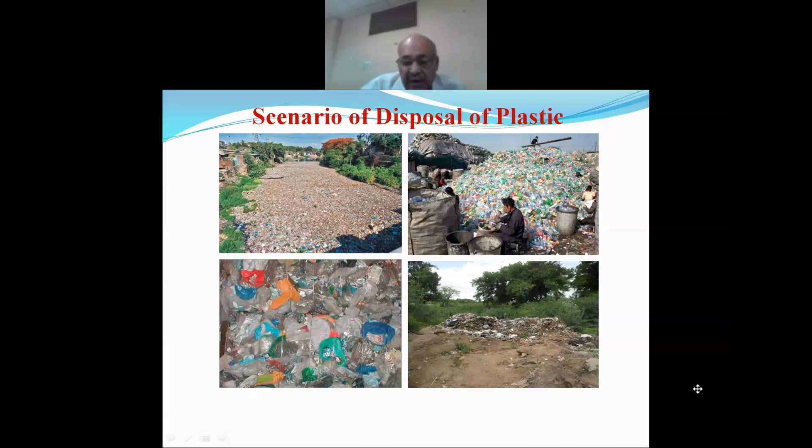Similarly, use of plastic waste and used tires in road construction is the need of the day to have a cleaner India. The Prime Minister also announced and suggested the use of rubber and plastic in road construction to alleviate its disposal problem. Waste is wealth, and we have to look for alternatives, methods and technologies to utilize waste in road construction and other developmental activities. Roads are one of the best consumers of waste.

Let us use non-biodegradable waste like plastic waste and rubber from truck tires in road construction. In this slide, you can see the scenario of disposal of plastic. On the top left hand side, you can see that plastic is dumped in the drain and has totally clogged it. On the right hand side, you can see how plastic is scattered outside, making wastage of usable good.

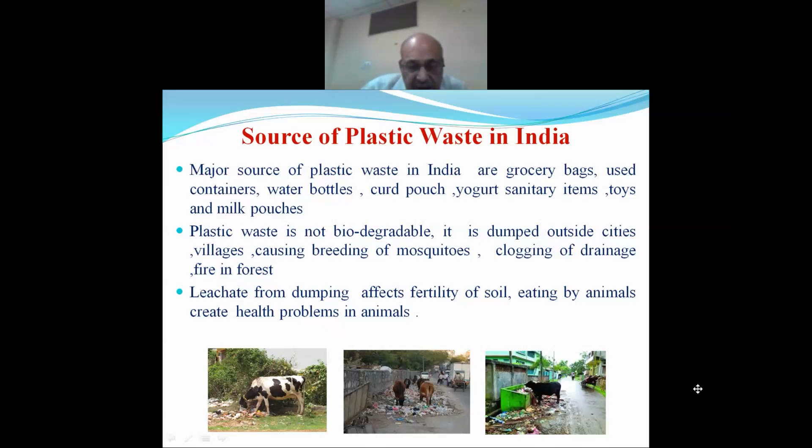If we consider the plastic waste, the optimum dose is 6 to 8% by weight of bitumen. At the same time, if we consider crumb rubber from tires, the optimum dose is about 8 to 10%. Therefore, roads are a better candidate for use of this non-biodegradable waste, particularly in our country.

Sources of the plastic waste in India: there are various sources like grocery bags, used containers, water bottles, curd pouches, milk pouches, yogurt cups, toys, etc. And the plastic or polymer used in making these goods is not biodegradable, and therefore it cannot degrade in the soil.

It is dumped outside cities and villages, causing breeding of mosquitoes, clogging of the drainage system, and many a times presence of this plastic in forest areas leads to fire. The leachate from dumping affects fertility of soil, and many a times people throw plastic along with eatables, which is eaten by animals, creating health problems. Many a times cows and buffaloes die because of eating the plastic.

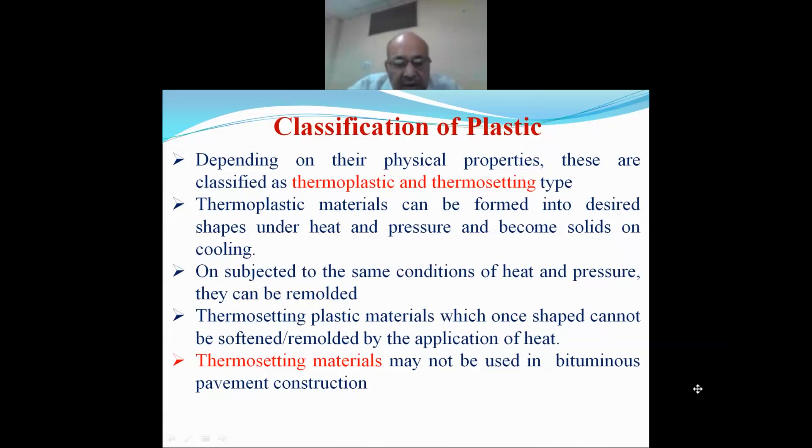Now we have to understand, when we are going to utilize any waste in road construction activities, we must understand about the material also. So depending upon physical properties, waste plastic is classified into two types: one is thermoplastic and the other is thermosetting plastic. So what is the difference between thermoplastic and thermosetting plastic?

Thermoplastic plastic melts upon heating and becomes solid upon cooling, and this can be remolded and is ideally compatible with bitumen. But the thermosetting plastic, once heated, cannot be remolded back. So we cannot transform one form of thermosetting plastic into other form, and this is not compatible with bitumen.

Thermoplastic plastic can be formed into desired shapes under heat and pressure and become solid on cooling. Thermosetting plastic, once shaped, cannot be remolded or converted back to its original form, and shall not be used with road construction.

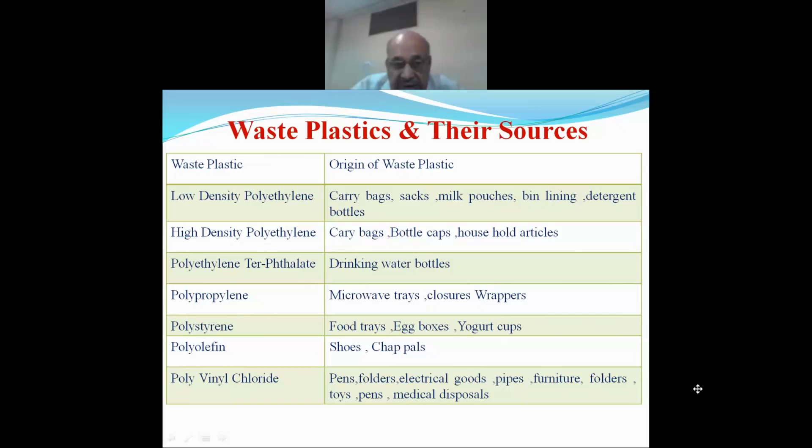What are the sources of different types of thermoplastic plastic which can be used in road construction? Low density polyethylene sources are carry bags, sacks, milk pouches, detergent bottles, etc. High density polyethylene sources are carry bags, bottle caps, and many household articles. Polyethylene terephthalate sources are drinking water bottles. Polypropylene sources are microwave trays, closures, wrappers. Polystyrene sources are food trays, egg boxes, yogurt cups. Polyolefin's major sources are shoe soles and chappals, etc.

Polyvinyl chloride sources are pens, folders, electrical goods, pipes, furniture, toys, medical disposals, and water containers. So this was a basic idea about the various types of plastics, and the plastics which can be used in road construction. All plastic cannot be used in road construction, so we must be very clear about it.

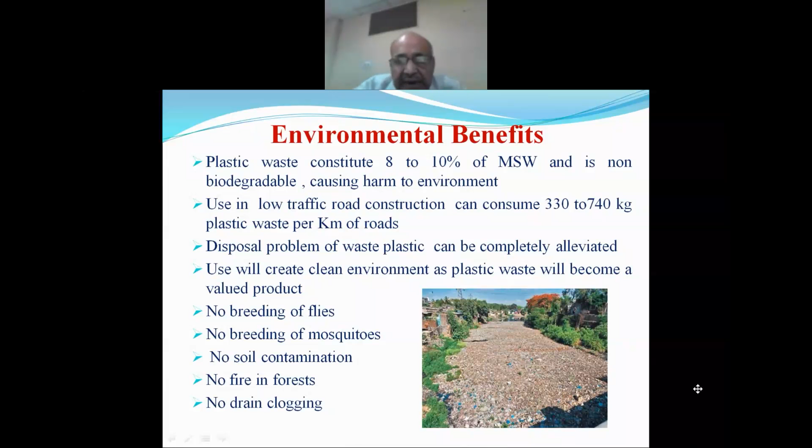If it is used in road construction, it may become a priced item. Estimated income is about 250 to 500 per day for the laborers engaged in collection, cleaning, and shredding. Being a priced product, it will not be thrown into the streets. Rag pickers will be benefited by selling this plastic waste for road construction activities to the shredders.

Reduced chances of infection is an environmental and health benefit, and reduced fire risk due to MSW being free from this non-biodegradable plastic waste is another safety benefit. Plastic waste constitutes, as we discussed, 8 to 10% of MSW, and it harms the environment.

Use in road construction addresses the problem of the plastic. The use results in no breeding of flies and mosquitoes, no contamination to soil, no fire in the forest, and no draining or clogging of the drainage system. Those are the environmental advantages.

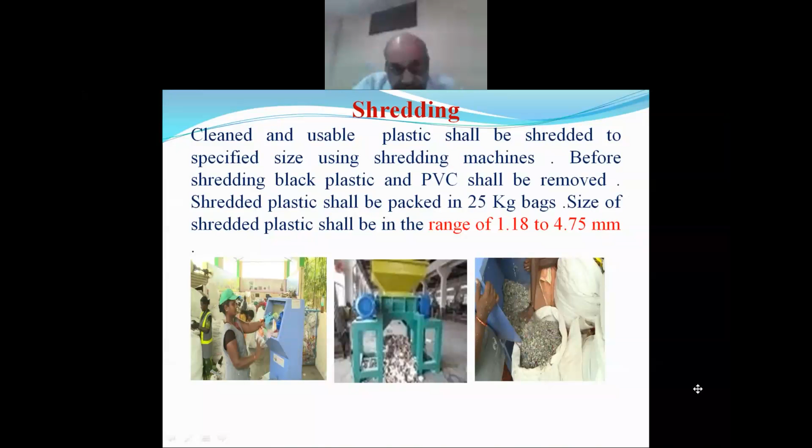Its size has to be reduced by a process known as shredding. Clean and usable plastic shall be shredded to specified size as specified in the IRC standard using a shredding machine. Before shredding, all plastic which is black in color, supposed to be having PVC, shall be removed.

That is because it is harmful to the health of construction workers during road construction. Shredded plastic shall be packed in bags of 25 kg. The size of plastic for road construction shall be 1.18 millimeter to 4.75 millimeter.

In the picture, you can see a shredding machine on the left hand side, another shredding machine in the middle of the slide, and on the right hand side, after shredding, the plastic is packed in bags. 25 kg of plastic can be packed in a bag.

Now specification. Whenever we use a waste or a product material in road construction, we have to have the specification. Therefore, specification for plastic waste has also been drafted and developed by IRC and other agencies like Rural Road specification. Useful plastic for road construction comprise polyethylene, polypropylene, polystyrene, polyethylene terephthalate, polyolefin, etc.

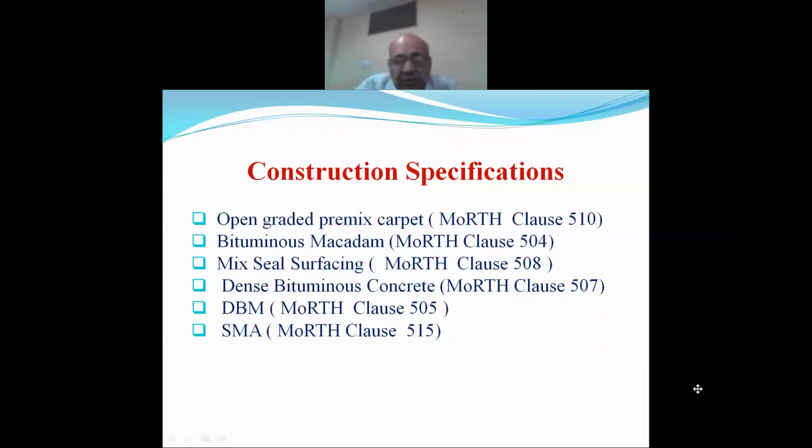In case of a drum mix plant, the drum mix plant shall be modified, and it should have a central entry system, addition system, which I am going to explain later on. In case of the batch type plant, it can be directly added to the pug mill, with the help of labor or with the help of a special conveyor and bin.

Plastic shall be cleaned before shredding. One thing you have to remember: temperature of the mixing and rolling shall be 10 degrees centigrade higher than the conventional mix. Another precaution is the quantity of bitumen shall not be reduced.

A number of specifications can use plastic for modification, like open graded premix carpet as per MoRTH clause number 510, bituminous macadam as per clause number 504, mixed seal surfacing as per clause number 508, dense bituminous concrete clause number 507, DBM clause number 505, and stone matrix asphalt clause number 515.

Now I will give you some tips about supervision of construction and quality control. First of all, one important aspect is storage of the plastic because it is a flammable material. It can catch fire, which may become a serious problem. Storage and handling, collection and procurement may be done prior to start of construction work after finalization of the specification.

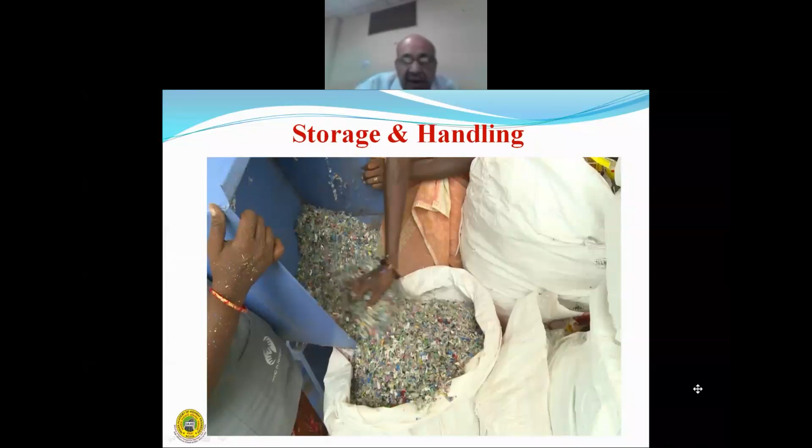Material shall be packed in bags of appropriate size. It will not be stored in open, preferably 25 kg bags, and it should be stored in a shade, dry and cool place.

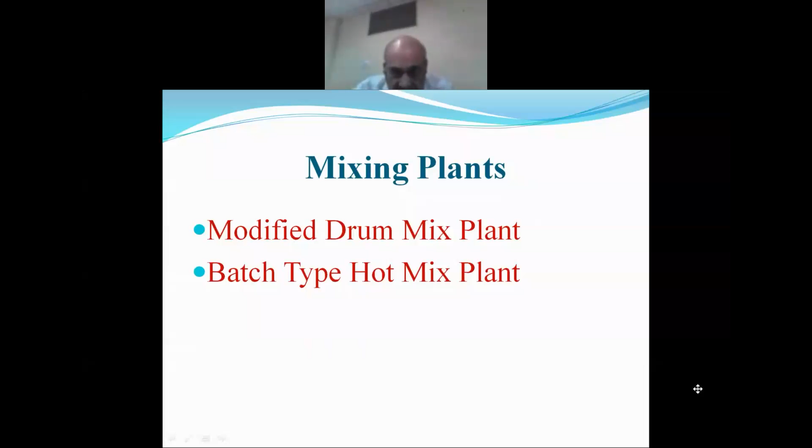One lane kilometer of road requires 370 kg of plastic waste for open graded premix carpet. One lane kilometer means 3,750 square meters. 370 kg of plastic waste for open graded premix carpet, 720 kg plastic waste for closely graded premix carpet, also called mixed seal surfacing, and 750 kg plastic waste for DBM.

A load of plastic waste may comprise 1 ton, which should be tested for field level test, and the recommended field level tests are sieve analysis test and ash content test.

Specification: the plastic waste shall be consistently polypropylene, and plastic waste shall be shredded to the size of 4.75 mm.

Two types of plants can be utilized for construction of the preparation of the plastic modified mix: modified drum mix plant or batch type hot mix plant. This is a modification of the plant, a mini hot mix plant, where provision is made for adding the plastic over the aggregate in a drum of the drum mix plant.

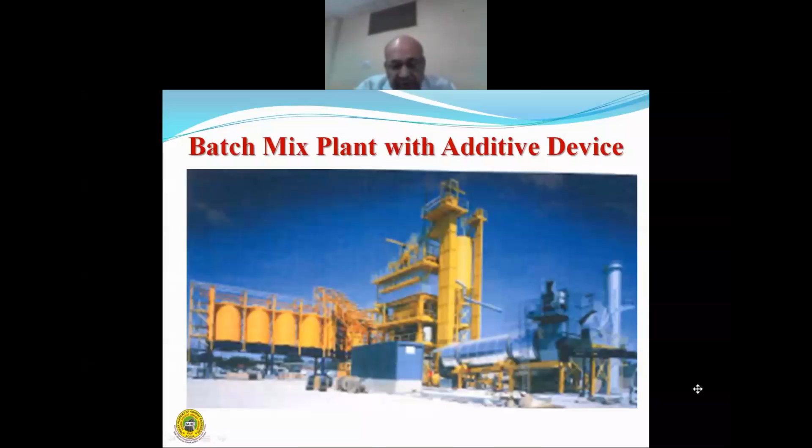So for the drum, we have two options. The drum of the drum mix plant has to be modified into three parts. One is the fire chamber, where the aggregate is heated. The second is the chamber for shredded plastic waste, and the third for adding the bitumen.

Once the aggregate is heated on the left hand side in the fire part, the aggregate is pushed to the middle part of the drum, where an opening is provided for adding the plastic over the heated aggregate. Here it is mixed with heated aggregate. The plastic melts and coats the aggregate, and then bitumen is added over the coated aggregate in the third part of the drum.

This is a typical batch mix plant with an additive device. It can be a good option for making the plastic modified mix.

These are the pictures of road construction activities with plastic bed. The paving system is the same as whichever is used for other types of bituminous mixes. There is no change. All pavers, every type of paver, can be used, and similarly you can see some of the roads, rural roads. Pictures are shown on the right hand side.

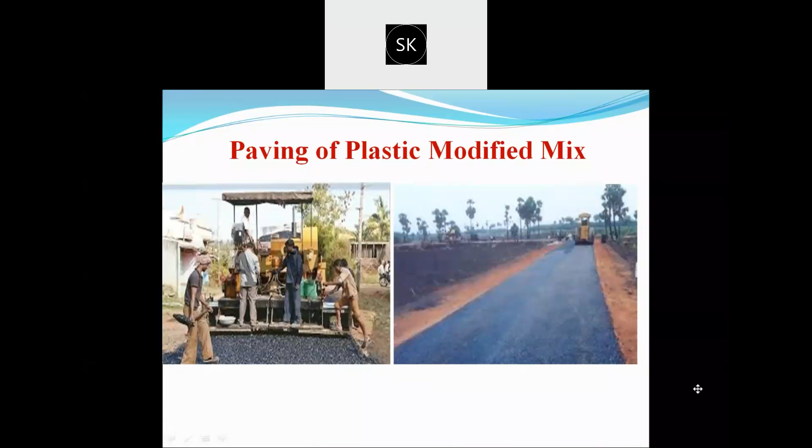The binder at mixing temperature in the range of 165 for VG10, 160 for VG20, 175 for VG30, and 185 for VG40. Aggregate temperature 160 to 180, and we have to maintain a difference of 14 degrees centigrade between the temperature of the binder and the aggregate.

Mix at mixing plant 140 to 160 degrees centigrade, mix at laying site 130 to 150 degrees centigrade, rolling at laying site 115 to 135 degrees centigrade.

So there is a requirement of about 15 degrees higher temperature for rolling of the plastic modified mix.

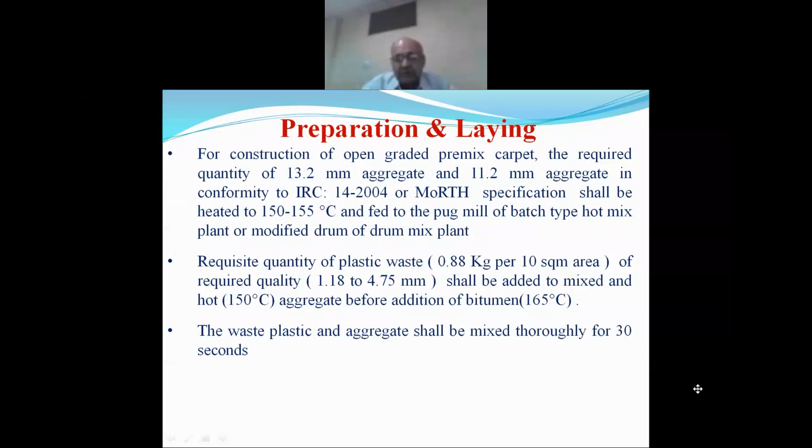For 10 square meter area, the aggregate of nominal size 13.2, passing 22.4 and retained on 11.2, should be 0.18 cubic meter. Coarse aggregate of nominal size 11.2, passing 13.2 and retained on 5.6, 0.09 cubic meter. Bitumen VG10 to VG30—no VG40 grade bitumen is recommended—for plastic waste 14.6 kg, and plastic waste in 10 square meter area 0.88 kg.

So these are the quantities. Preparation and laying: requisite quantity of the plastic waste, that is 0.88 kg per 10 square meter area, of required quality.

Quality means it should be passing 4.75 mm sieve. Waste plastic powder should be passing 4.75 mm sieve and retained over 1.18 mm sieve. It shall be added to the mixed aggregate heated to about 150 degrees centigrade, before addition of bitumen, 14 degrees higher. The plastic-aggregate mix shall be mixed thoroughly for 30 to 60 seconds.

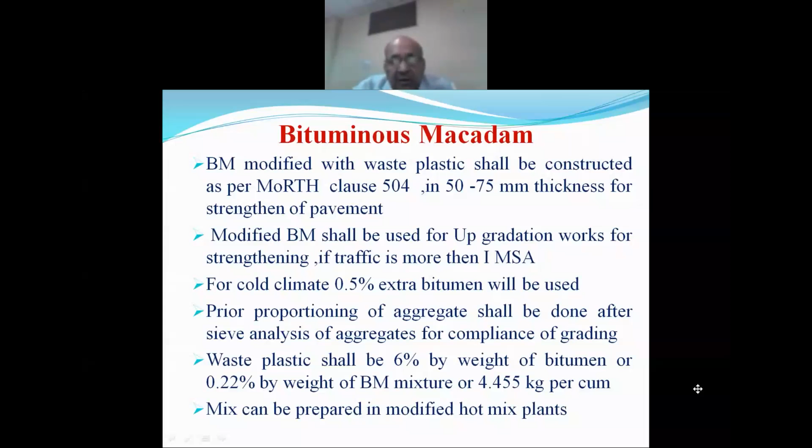Bitumen. The procedure for mixing conventional construction of BM, DBM, MSS or SMA.

In case of bituminous macadam, BM modified with plastic waste shall be constructed as per MoRTH clause number 504 in a thickness of 50 to 75 mm. Modified BM shall be used for upgradation work for strengthening if traffic is more than 1 MSA. For cold climate areas, 0.5% extra bitumen will be used.

Prior proportioning of the aggregate shall be done after sieve analysis of the aggregate for compliance of the grading. Plastic waste shall be 6% by weight of bitumen, or 0.22% by weight of the bituminous mixture.

Mix can be prepared in a modified hot mix plant. For construction of 100 square meter area, grading given in MoRTH clause 504 shall be applicable. 25 kg of the plastic waste shall be added over heated aggregate.

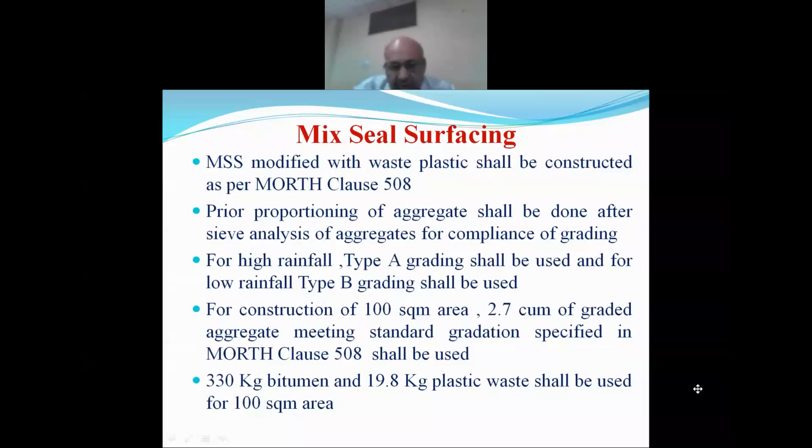mixed seal surfacing or closely graded premix carpet. MSS or closely graded premix carpet modified with plastic waste shall be given in MoRTH clause number 508.

Prior proportioning of the aggregate shall be done after sieve analysis of the aggregate at site for compliance of the grading. For high rainfall areas, type A grading shall be used, and type B grading shall be used for low rainfall areas.

For construction of 100 square meter area, 2.7 cubic meter of the aggregate meeting the standard gradation shall be used, and 330 kg of the bitumen, and 19.8 kg of the plastic waste shall be used for 100 square meter area.

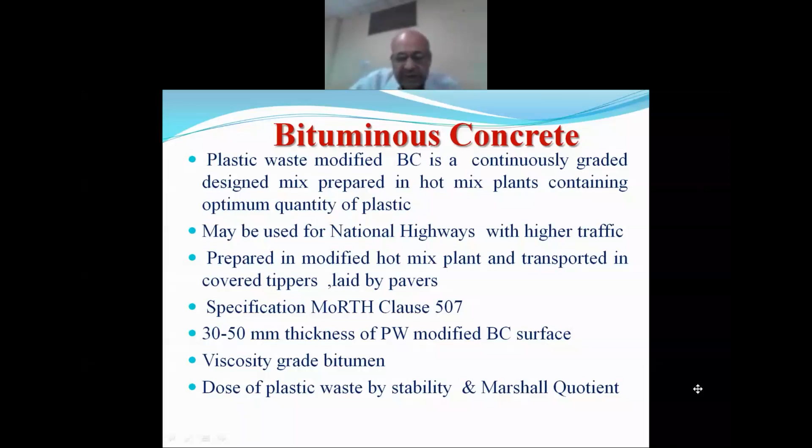Mix shall be prepared in a modified drum mix plant or a batch mix plant, and transported to site in covered tippers, spread by paver and rolled as per normal procedure.

Now the bituminous concrete we generally use on national highways, state highways, and sometimes on MDR also. Plastic waste modified bituminous concrete is a continuously graded design mix prepared in a hot mix plant, and may be used on national highways with higher traffic.

Mix shall be prepared in a modified hot mix plant and transported in covered tippers. 30 to 50 mm thickness of plastic waste modified BC mix is recommended. A viscosity grade bitumen, preferably VG10 or VG30 - VG10 for cold climate areas and VG30 for hot climate areas - shall be used for plastic waste modified bitumen.

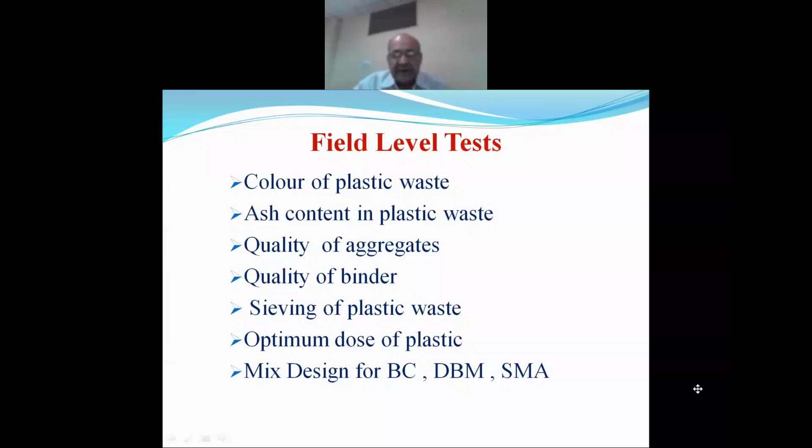Plastic waste shall not be black and must meet requirement of IRC specification. It may contain LDPE, HDPE, etc. Sieve analysis test and ash content test at site, besides binder content and stripping test. Size of the plastic shall be 4.75 to 1.18 mm.

Ash content shall not exceed 1%. Clause number 900, that is, test and test frequencies applicable to conventional construction are also applicable to construction of various specifications of plastic waste modified mixes.

Field level tests for plastic waste, some observations as well as tests are recommended. Number one, color of the plastic waste, not black. Ash content in plastic waste, less than 1%. Quality of the aggregate as per specification of MORTH. Quality of binder as per specification of MORTH.

Sieving of the plastic waste, optimum dose of the plastic waste by mix design. There is no need of mix design for PMC, open graded premix carpet, or mixed seal surfacing, but the mix design requirements are there for DBM, SMA, and BC.

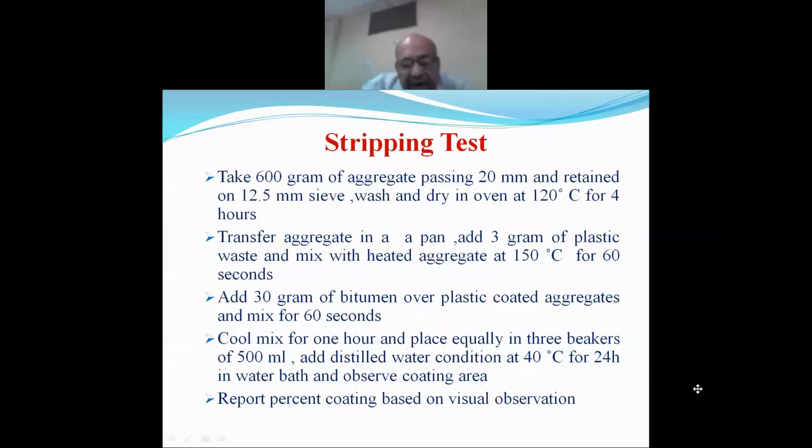Plastic must pass 100% through 4.75 mm and must be retained about 98% on 1.18 mm. Material passing 75 micron shall not exceed 2%, and tested for ash content by heating at 600 degrees centigrade. So this is the procedure.

Another important test: it is expected that there is no stripping in the aggregate if it is coated with plastic waste. So a stripping test has to be carried out in case of plastic waste modified mix.

Take 600 gram of the aggregate passing 20 mm and retained on 12.5 mm sieve. Wash and dry the aggregate in oven at 120 degrees centigrade for 4 hours. Transfer aggregate in a pan. Add 3 gram of the plastic waste and mix with heated aggregate at 150 degrees centigrade for 60 seconds.

Add 30 gram of bitumen over the plastic coated aggregate and mix for 60 seconds. Cool mix for 1 hour. Place equally in 3 beakers of 500 ml each. Add distilled water, condition at 40 degrees centigrade for 24 hours in a water bath, and observe the coated area next day and report percent coating based on visual observation. So this is the procedure.

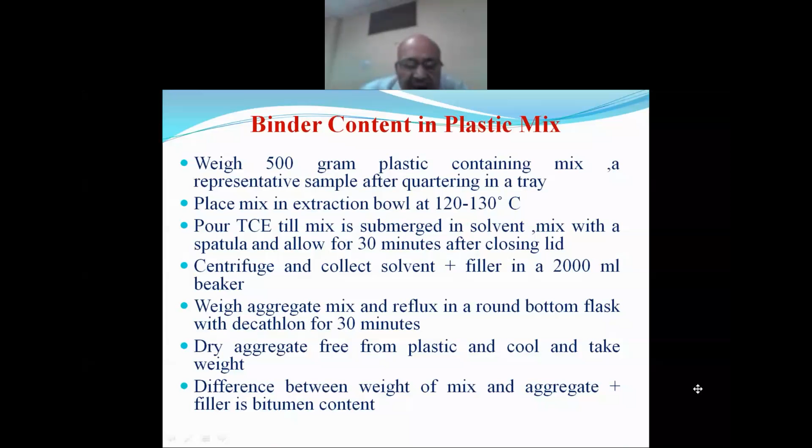Now the binder content test in plastic mix, it is slightly different than the normal test. So how to do the binder content test? Weigh 500 gram of plastic containing mix.

Take a representative sample after quartering the mix in the tray. We can take 2 kg mix in a tray, and after quartering we can take 500 gram. Place the mix in an extraction bowl at 120 to 130 degrees centigrade.

Pour trichloroethylene into the mix. Submerge in the solvent, mix with a spatula and allow for 30 minutes. After closing the lid, centrifuge and collect the solvent plus filler in a 2-liter beaker.

Weigh aggregate mix and reflux in a round bottom flask with a solvent called decalin for 30 minutes. Dry aggregate free from plastic, because plastic will dissolve in decalin, then cool and take the weight. Difference between weight of mix and aggregate plus filler is the bitumen content in the plastic waste modified mix.

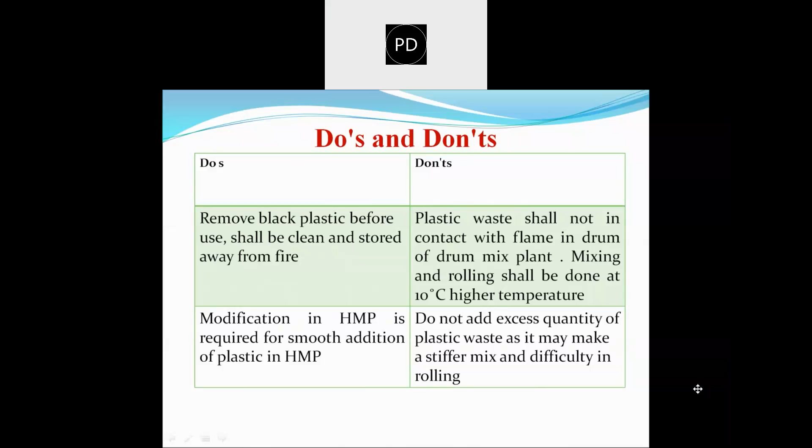Tests during construction include grading, stability, void analysis, binder content, temperature of aggregate, temperature of mix, thickness of the compacted layer, and density. Regarding density, one test for 700 square meter area has to be carried out.

Now, at the end of this part of the lecture, what are the do's and don'ts?

Do's: remove black plastic before use, it shall be clean and stored away from fire. Modification in the hot mix plant is required for smooth addition of the plastic without any decomposition.

Don'ts: plastic waste shall not be in contact with flame in the drum of the drum mix plant. Mixing and rolling shall be done at 10 degrees centigrade higher temperature. Do not add excess quantity of plastic waste as it may make a stiffer mix, causing difficulty in rolling, and the mix may crack early.

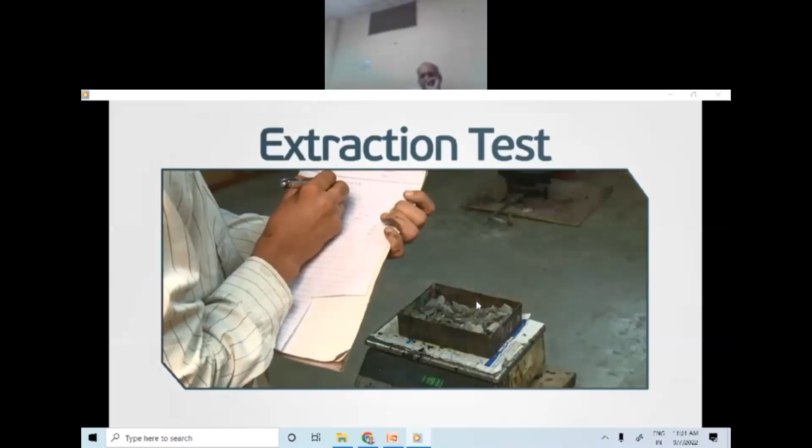We will give you a copy of this film so you can see at your end with sound.

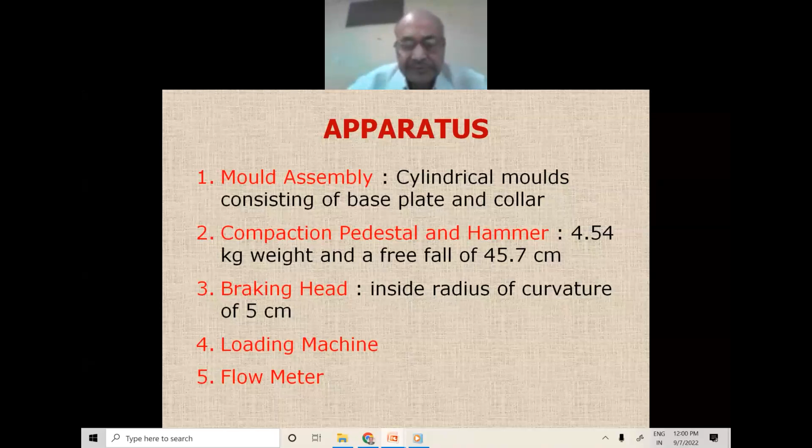Now, how to do the mix design? The procedure is same as we do the mix design for normal bituminous mix. So briefly, I will review the mix design procedure.

It involves various steps: selection of the aggregate, selection of the plastic waste, selection of the aggregate gradation, proportioning of the aggregate to meet the required gradation, and selection of the bitumen. Selection of the bitumen is also important.

If we are using plastic waste, the use of VG40 should be avoided. Preparation of the Marshall specimen, testing of the specimen for density, stability, and flow, density void analysis, determination of the optimum bitumen content, and computation of the material for 100 square meter area apparatus.

Apparatus are normal Marshall apparatus. It comprises mold assembly, cylindrical molds consisting of base plate and collar, compaction pedestal and hammer. The weight is 4.54 kg from a free fall of 45.7 centimeter. Breaking head inside radius of curvature of 5 centimeter, loading machine, and flow meter.

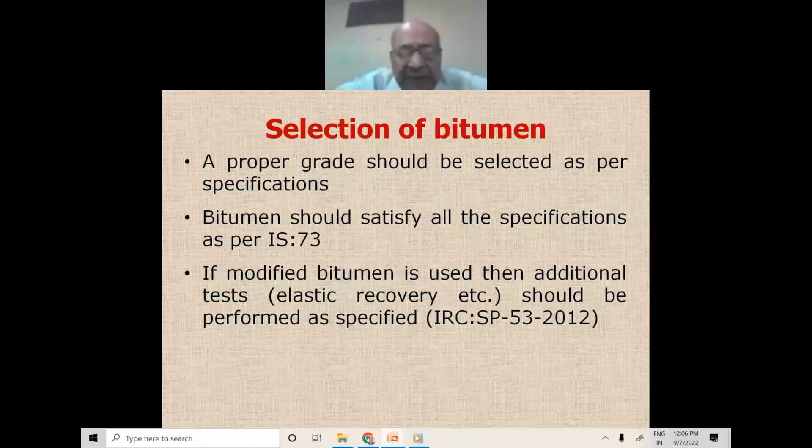Then the next step is selection of the bitumen. A proper grade of the bitumen is required to be selected, and it should satisfy the specification, properties, and limits given in IS 73 2013.

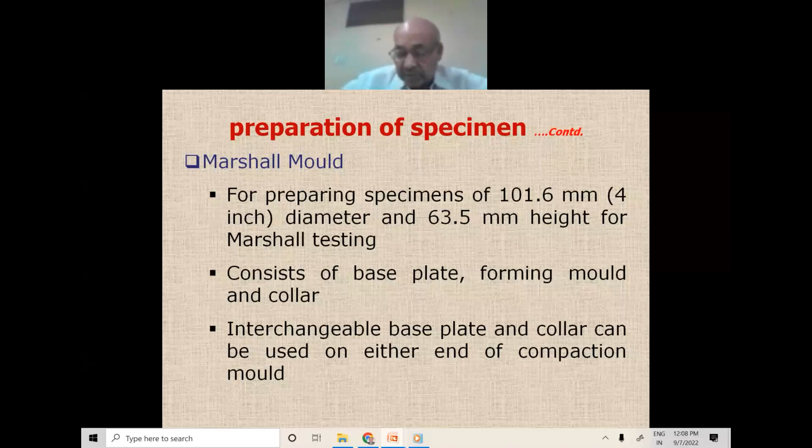Now we have to prepare the specimen. We have to take the plastic meeting the requirement of the specification, gradation, and quality, and prepare the specimen for optimum bitumen content. First, we will prepare the specimen for optimum bitumen content, and the coarse aggregate, fine aggregate, and filler material should be proportioned and mixed as per the dry mix design.

Required quantity of the dry mix is then taken so as to produce a compacted bituminous specimen of thickness 63.5 mm approximately. 1100 gram of the aggregate and filler is taken to get the standard specimen. The dry mix of the aggregate and filler is heated to a temperature of 150 to 160 degrees centigrade.

The compaction mold assembly and hammer are cleaned and kept preheated to a temperature of 100 to 145 degrees centigrade. The bitumen is heated to a temperature of 150 to 165.

Samples are prepared, 3 each at each bitumen content with the first trial percentage of the plastic waste and bitumen. The mixing temperature of the VG30 is about 165 degrees centigrade.

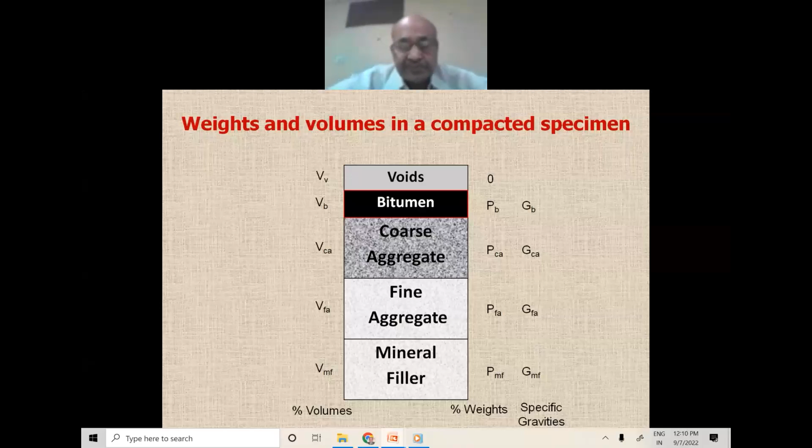The mix is placed in the mold and compacted by hammer with about 75 blows on each side. The weight of the hammer is 4.54 kg and height of fall is 457 millimeter. Compacting temperature may be around 135.

The compacted specimen should have a thickness of 63.5 plus minus 1.3 mm. After curing the specimen for a day, samples are to be extracted. The minimum time gap between preparation of the sample and extraction shall be 6 hours.

The compacted specimens are extracted using a sample extractor after the curing time. The sample extractor is designed for fast extrusion of the samples from compaction molds.

At least 3 specimens shall be prepared at each trial bitumen content, which may be varied at 0.5% increment. Similarly, at least 3 specimens shall be prepared for each trial plastic waste content.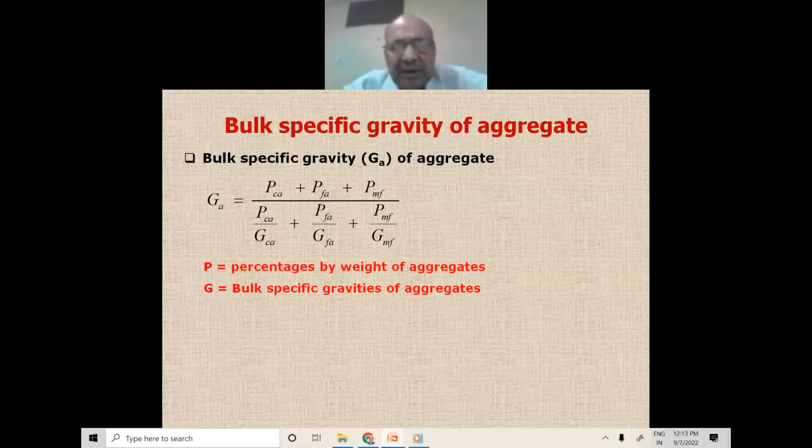So after preparation of the specimen and taking out the specimen from the molds, the following quantities are to be worked out by carrying out density void analysis: bulk specific gravity of the compacted mixture, bulk specific gravity of the aggregate, theoretical maximum specific gravity of the mixture, percent air voids in the final mix, percent air voids in mineral aggregate, and percent aggregate voids filled with bitumen.

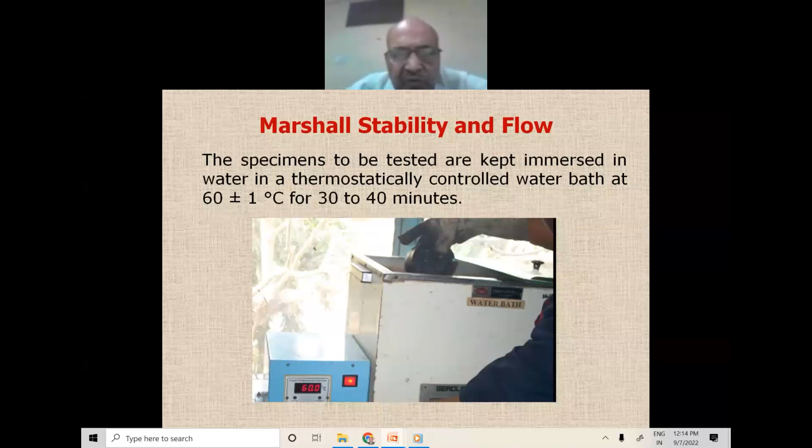Next, if samples are porous, as in the case of BM, bituminous macadam, the specimen has an open permeable surface. The procedure given in ASTM D1188 shall be adopted, and GMB shall be calculated by the formula W divided by W dash minus WW, where W dash is the weight of coated specimen in air, WW is the weight of coated specimen in water, and GP is the specific gravity of the paraffin coating at 25 degrees centigrade. Then we will calculate the bulk specific gravity of the combined aggregate by the formula GA equals PCA plus PFA plus PMF divided by (PCA divided by GCA, PFA divided by GFA, PMF divided by GMF).

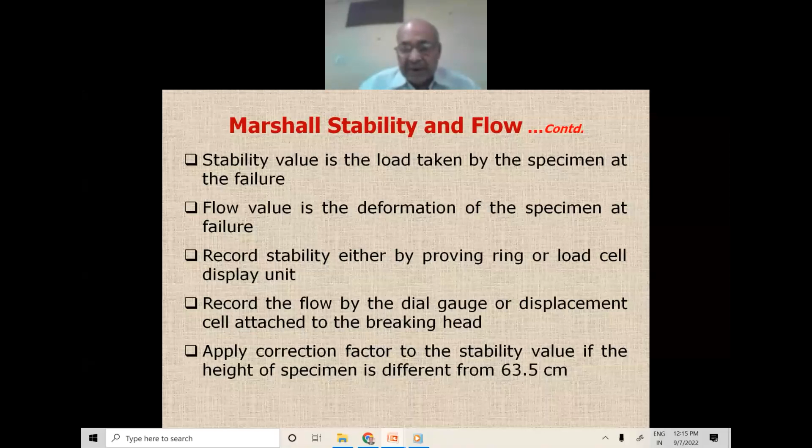We have to determine the maximum theoretical specific gravity by the Rice method, or it may be calculated by the formula GT equals 100 divided by (PCA divided by GCA, PFA divided by GFA, PMF divided by GMF, plus PB, percentage of bitumen divided by GB, specific gravity of the bitumen).

Then we have to calculate the voids in the final mix: 100 multiplied by GT minus GMB divided by GT, where GT is the theoretical specific gravity and GMB is the experimental bulk density of the specimen.

Then we have to calculate the voids in mineral aggregate, and then aggregate voids filled with bitumen. VFB equals 100 multiplied by VMA minus VV divided by VMA.

After that, all the specimens are to be tested in water controlled at 60 degrees plus minus 1 degree for 30 to 40 minutes. Then take out the specimen from the water bath and place it in a breaking head. Place the breaking head in the Marshall testing machine, and the load is applied on the breaking head by the loading machine at the rate of 5 centimeters per minute.

Stability value is the load taken by the specimen at failure, and flow value is the deformation of the specimen at failure. Record stability either by proving ring or load cell, and record the flow either by dial gauge or displacement cell attached with the breaking head.

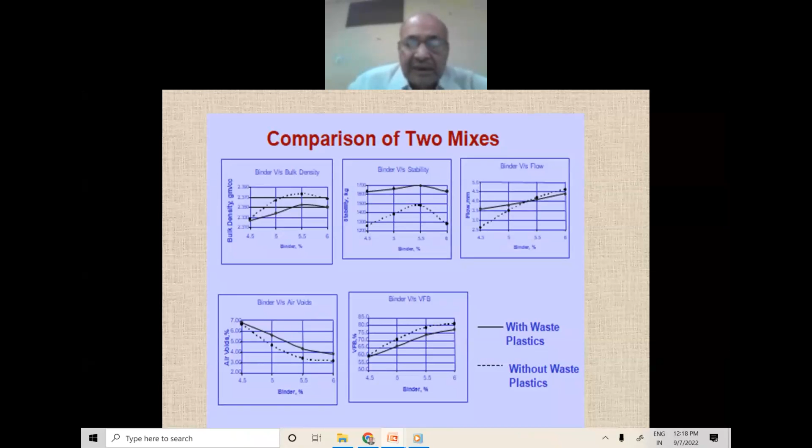After getting the optimum bitumen content, we will determine the optimum plastic content in the mix. So at optimum bitumen content, say 5.5%, we will prepare samples varying the plastic content at 5%, 6%, 7%, and 8%. All the properties like stability, flow, voids, voids filled with bitumen, and voids in mineral aggregate shall be determined.

This slide shows a comparison of two mixes, one without plastic waste and the other with plastic waste. We can see that with plastic waste, the stability values are high and flow is less. So the Marshall quotient of mix with plastic waste is always towards the higher side. But remember, it should not exceed...

500 kg per mm. And if you add more plastic, it will definitely exceed 500, and the mix will become stiffer, and you will face difficulty in paving and compaction, and the surface may crack early if there is a lower temperature in the winter.

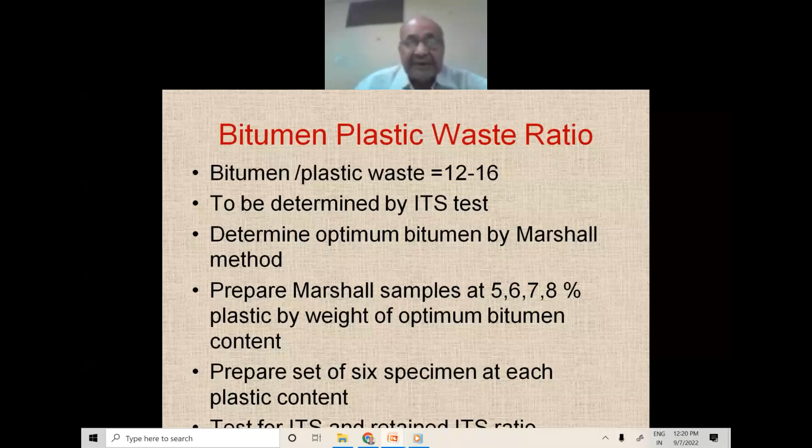Another important factor for mix design is filler to bitumen ratio. The filler to bitumen ratio shall be in the range of 0.6 to 1.2 by weight. For example, if filler is 40 gram and bitumen is 51 gram, then filler to bitumen ratio is 0.78, which is acceptable. If filler to bitumen ratio is less than 0.6, it indicates stability is insufficient. If filler to bitumen ratio is more than 1.2, it indicates durability is affected.

The recommended filler is hydrated lime because it has certain advantages: hydrated lime reduces stripping, it acts as a mineral filler, stiffens the bitumen binder, improves resistance to fracture growth, favorably alters the oxidation kinetics, and interacts with the products of oxidation, reducing the harmful effects. It alters the plastic properties of clay fines in the fine aggregate, improving moisture susceptibility as well as durability.

Then, the bitumen and plastic waste ratio can be determined by ITS test. Determine the optimum bitumen content by Marshall method, then prepare samples at 5, 6, 7, and 8% plastic by weight of optimum bitumen content.

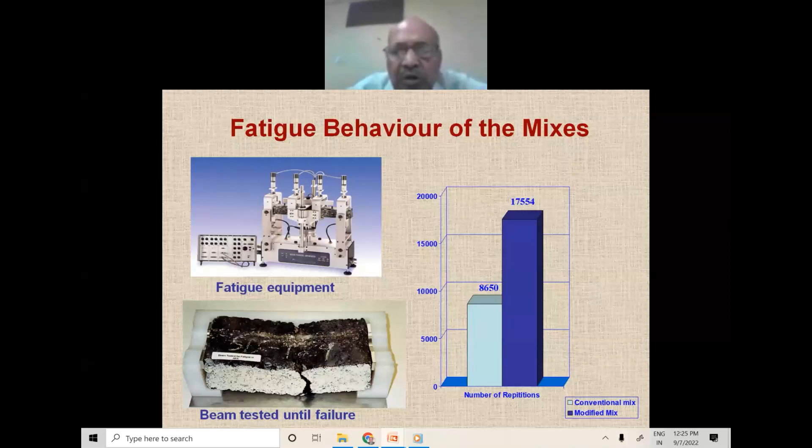This is the fatigue behavior of the mix. Fatigue test can be carried out on a beam, and the beam fatigue equipment is shown on the left hand side. The number of repetitions required for failure is 8,650 for bituminous mix without plastic, and 17,554 for bituminous mix with 6% plastic waste in bitumen.

Therefore, I recommend we get the best results at 6% plastic waste. But anyway, it has to be decided what should be the percentage of plastic waste in a bituminous mix, and that shall be decided by the test mix design. The main indicator to decide the content of plastic waste in mix design is indirect tensile strength as well as indirect tensile strength ratio.

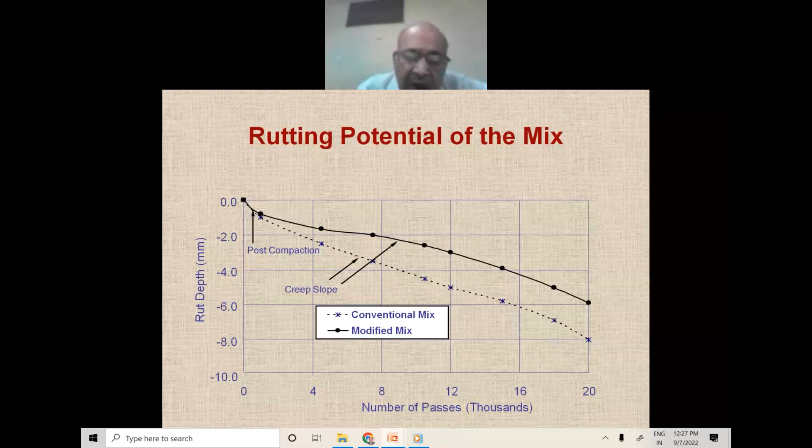Now the test on recovered binder. Through various tests we can find the difference between the recovered properties of the recovered binder. These are the results of the RUT test, where the dotted line represents the conventional mix with no plastic waste, and the solid line represents plastic waste.

After 20,000 passes, the rut depth in plastic waste modified mix is only 6 millimeters, compared to 8 millimeters in the unmodified mix. So we observe 25% less rut depth in the plastic waste modified mix as compared to the normal bitumen mix. This is all about how we can do the performance studies and the results of a typical case comparing unmodified and modified plastic waste mixes.

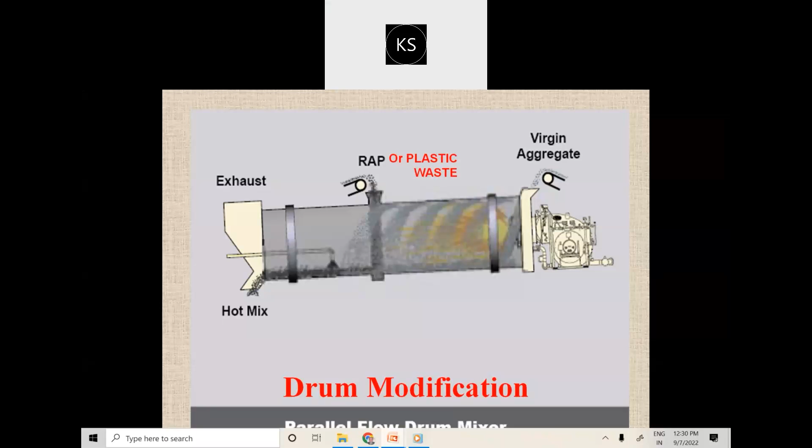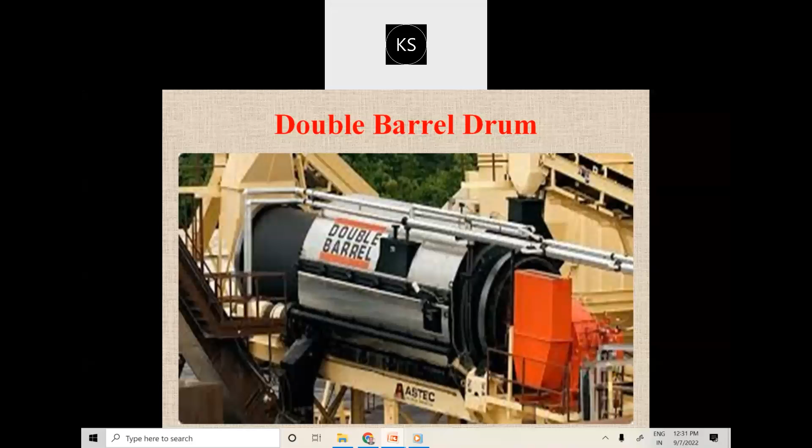We can use a modified drum mix plant for adding the plastic. We can modify the drum.

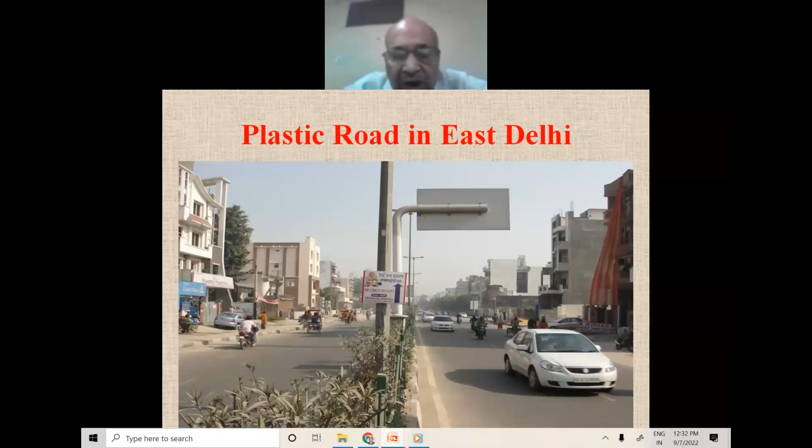So you can see the drum where a central entry can be created for adding the plastic waste, and the location of the central entry shall be beyond the flame, where the flame is present. So, at no cost, shall the plastic waste be exposed to the flame.

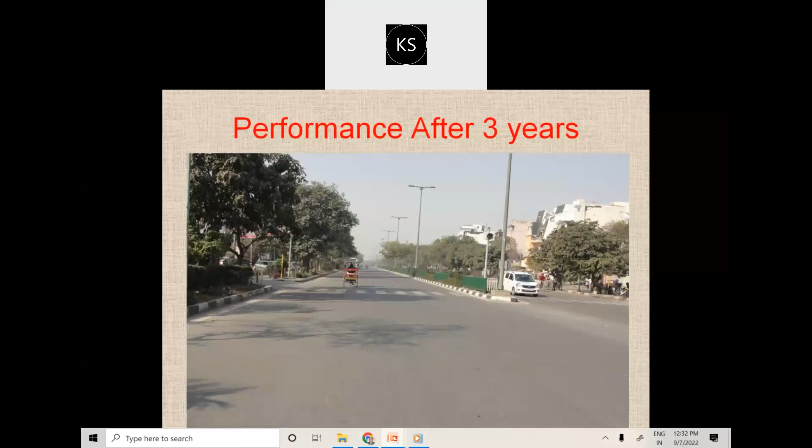So we have drum mix plants with double barrel. This is much better for making the plastic waste modified mix. The aggregate may be heated in the first barrel and the plastic waste can be added to the second barrel, so chances of exposing the plastic waste to the flame are totally eliminated.

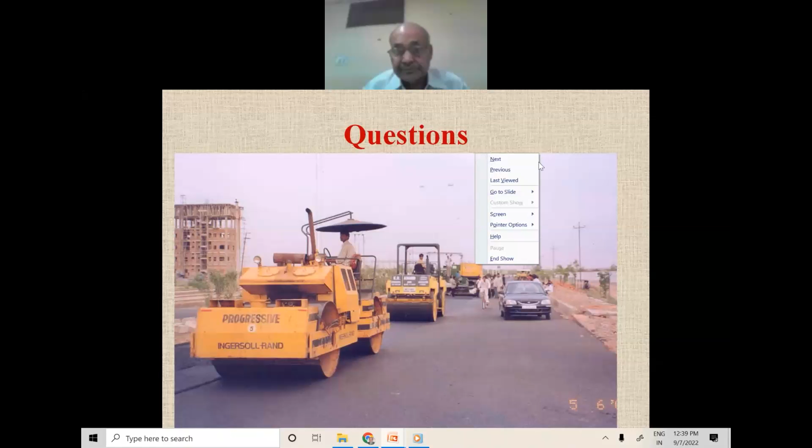Direct economy is nil. There is no economy, there is no direct economy. And indirect economy - because your maintenance expenditure reduces and durability increases.